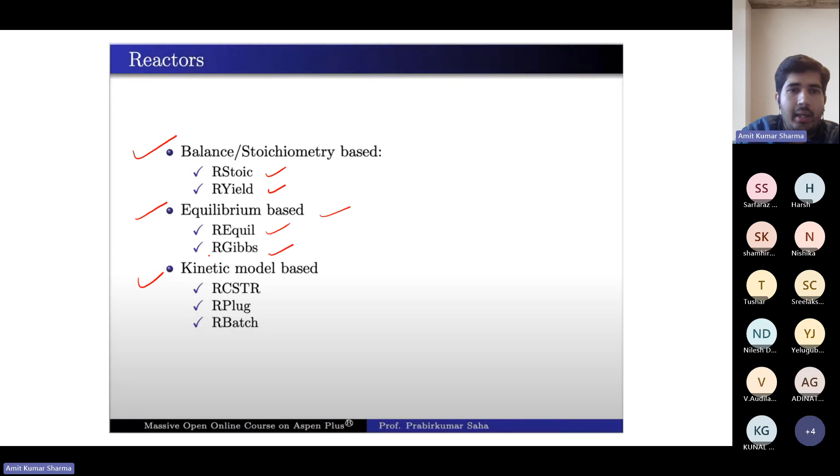So the reactors are basically three types. One is the balanced, then equilibrium, then kinetic. In balanced reactor, like R stoichiometric and R yield; in equilibrium based, REquil and RGibbs; and kinetic, R CSTR, R plug, and R batch. So these are the basic reactors. You can see these in the model palette. We have separate individual models for these kinds of reactors. Each reactor has its specific work. We will discuss briefly, and then we will go through some examples.

So in the stoichiometric block, the model works with the specific extent of reaction or conversion. If you know the conversion, you know all the stoichiometry, then we use this kind of block. Then there's a model where the reaction kinetics are unknown, but the stoichiometry is known, you know the stoichiometric coefficients and all the stoichiometry, but you don't know the reaction kinetics. Then we use this block. It performs product selectivity and heat of reaction calculation.

So important, what is the fundamental for solving behind this reactor. It performs the product selectivity and heat of reaction calculation. It can run either simultaneously or sequentially. This is about the stoichiometric block.

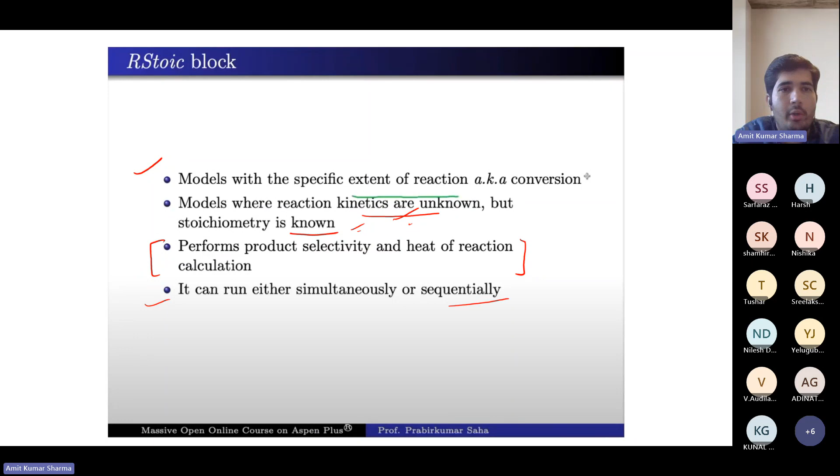Then the R yield block. It does not need kinetic or sizing information. For R yield, we don't need kinetic data, and we don't need the sizing information. Then here you need to choose the mole basis or mass basis. In mole basis, number of moles of the chemical leaving through the outlet per total mass of feed, and in mass basis, mass of the chemical leaving through the outlet per total mass of feed.

So basically you can define how much mole or mass will be leaving, and based on that, it will do the conversion. So R yield satisfies the total mass balance, based on the total mass balance, not the individual component balance. It gives a warning message that it's scaled up or down. The molar mass balance means that the total outlet mass flow rate is still equal to the inlet mass flow rate. So it is based on the total mass flow rate balance, the inlet flow will be equal to the outlet flow.

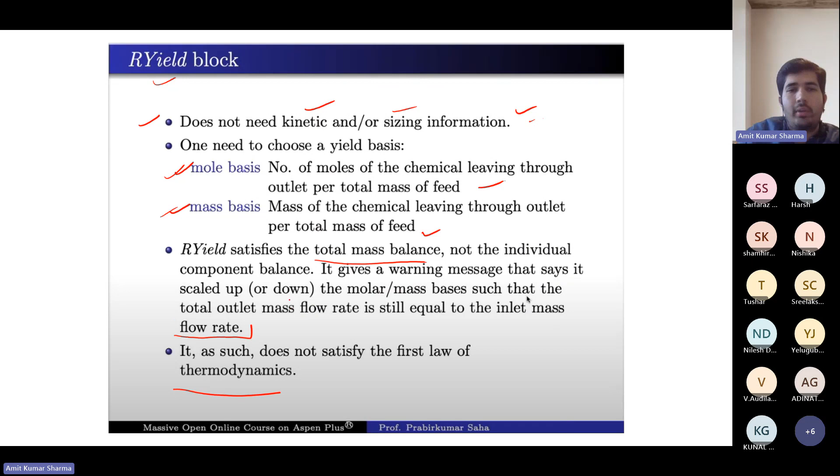As such, it does not satisfy the first law of thermodynamics. So it is important to note, it does not satisfy the first law of thermodynamics.

And REquil, this one is useful for modeling a reversible reaction, assuming that it achieves chemical and phase equilibrium. So you have a reversible reaction and you assume that it will achieve chemical and phase equilibrium. From the name itself, REquil is based on chemical or phase equilibrium. It calculates the maximum thermodynamically possible conversion one can achieve based on the reaction condition.

So it will go for the equilibrium, then find the maximum thermodynamically possible conversion. It is wise to use a sub-equilibrium condition at an approach temperature. We can also define the approach temperature. It computes the equilibrium constant directly from the Gibbs free energy of reaction at the temperature of the reaction condition. So you have defined the conditions, and based on those conditions, it will calculate the Gibbs free energy and do the equilibrium calculation.

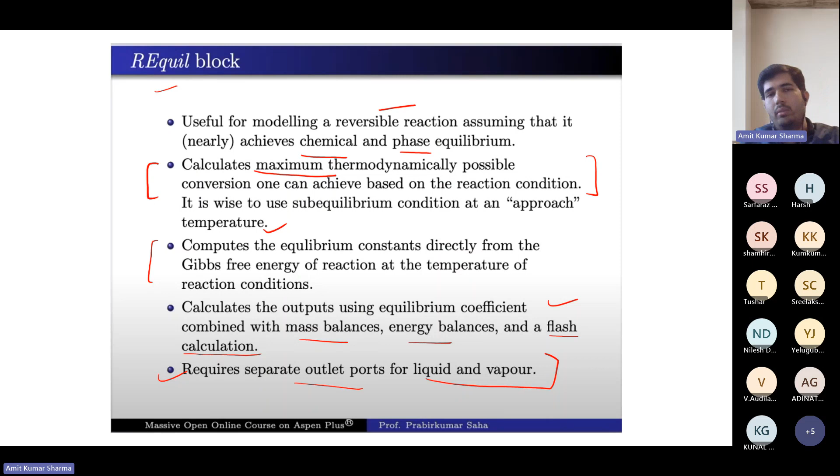It calculates the output using the equilibrium coefficient combined with mass balance, energy balance, and flash calculation. This is important, it will do the calculation using the equilibrium coefficient combined with mass balance, energy balance, and flash calculation. It requires separate outlet ports for liquid and vapor, because it is based on chemical and phase equilibrium, so it will show all phases from that equilibrium, some liquid or some vapor. Based on that, it requires separate outlet ports for liquid and for vapor.

Then the RGibbs block - it does not need to specify the equation. If you are using RGibbs, given infinite time for reaction, chemical equilibrium is achieved when the product mixture reaches its lowest possible Gibbs free energy.

So you don't know the reaction. You know that your system has carbon or hydrogen, and they will do some reaction at high temperature, so there will be some combustion. From that combustion, maybe different kinds of gases will be there, but you don't know their kinetics, like which will come in first. So you don't know all the data.

Similarly in reforming also, if you are having methane, CO2, and steam, there can be steam methane reforming, dry reforming, reverse water gas shift reaction depending on temperature, maybe methane cracking. So there can be different kinds of reactions, and you don't know all the reaction kinetics.

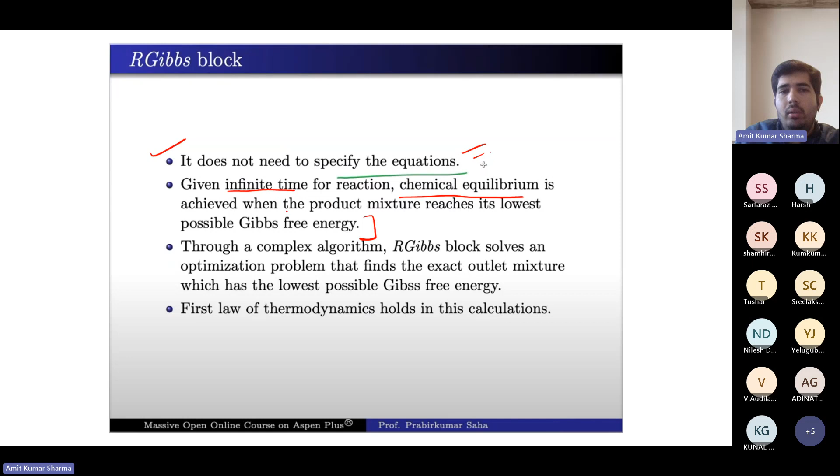But you know the input. So based on that, with the temperature condition and the pressure condition, it will assume infinite time of reaction, and it will reach chemical equilibrium, and it will show you all possible phases at the lowest possible Gibbs free energy.

So this is the Gibbs block, and through a complex algorithm, RGibbs block solves an optimization problem that finds the exact outlet mixture which has the lowest possible Gibbs free energy. And the first law of thermodynamics holds in this calculation, so it's also valid here. You can use this Gibbs block for the calculation to find out the possible outcome from some input.

So let's take an example. I think this example was also discussed in the class.

In this, you can see we have a reactor, and this reaction is actually the water gas shift reaction. The carbon monoxide will react with the steam and convert into hydrogen and CO2. You have given the temperature, the pressure, the flow rate, and 92% conversion of CO for RStoic and RYield, and 253 approach temperature for REquil. And you have to use the Peng Robinson equation of state with Boston Mathias property methods.

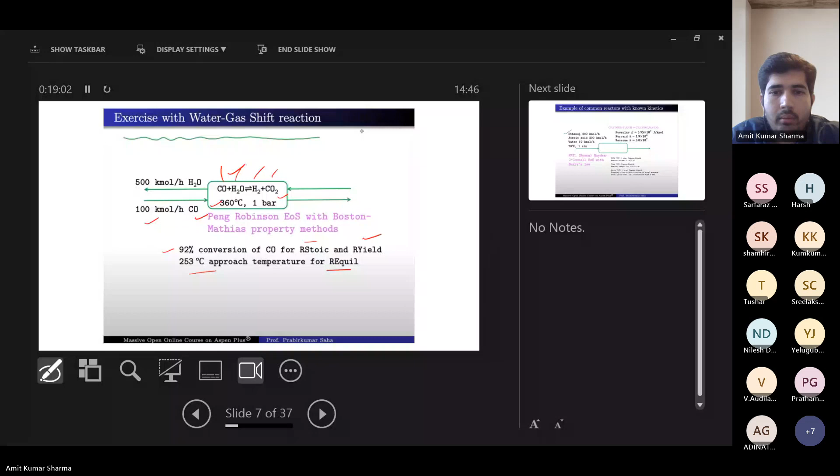I think my screen is visible. Yes sir, okay, thank you. I think someone is unmuted, please mute yourself.

Here I have all the reactors. Here we have the feed, then we have a duplicator, so we are supplying the same feed to all these reactors. And we will see how different options are available in each reactor, and what kind of things we can do with this.

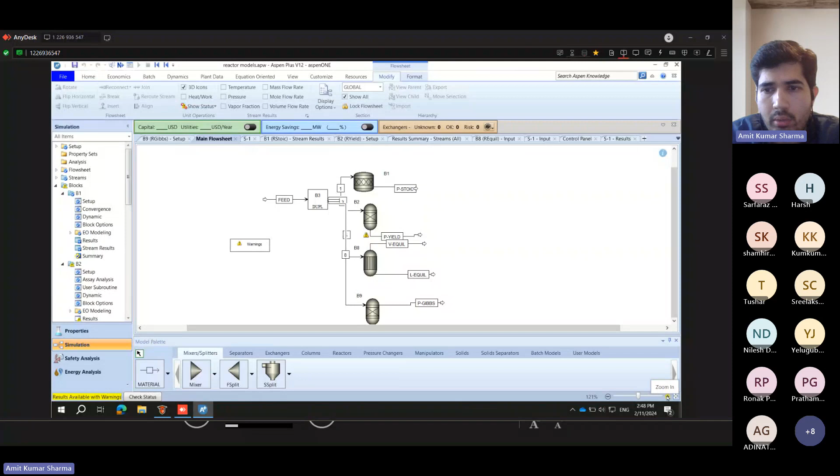So if you want to see the inputs, my screen is visible? Yes sir, yes, okay okay. Let me make it a little bit zoom. I think now it's better.

On the left side, you have all the items for the simulation. You can see the blocks B1, B2, B3. You can see all the results, and at the bottom you can see the result summary for all the results. So first go to the properties. If you want to see the inputs and methods, go to the property, then the components. So the components are H2O, water, carbon monoxide, carbon dioxide, and hydrogen.

So from the question, we have given a reactor and we are doing water gas shift reaction, we have given the flow rate of carbon monoxide, the flow rate of steam. Here you can see the output, and we have given the data for these two reactors and this reactor. So with only these inputs, we will model this for all the reactors. Let's see - so these are the inputs.

If you go to the methods here, we are using Peng Robinson with Boston Mathias modification. So we have given this method to use. I think somebody had a doubt regarding the free water method for petroleum calculation option - we have steam table correlations here, different kinds of correlations. Sometimes if you are using a particular method, we need to change this free water method also. So please check this, maybe the issue is with this.

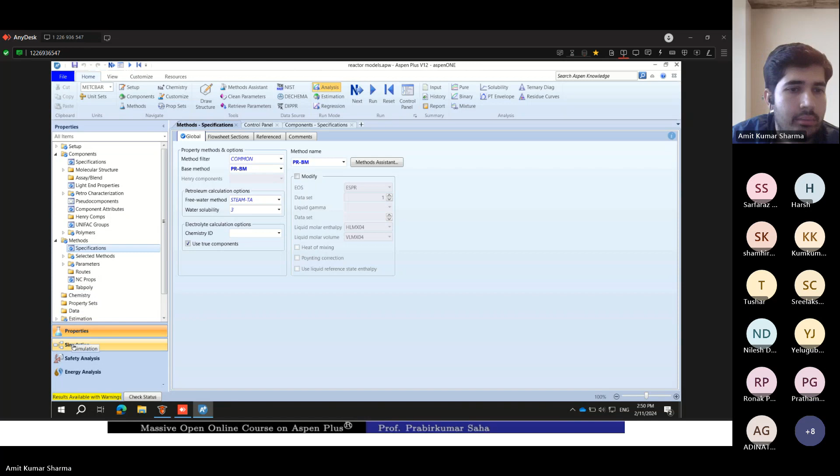At the bottom we have the reactor pallet: stoichiometric, yield, equilibrium Gibbs, CSTR, plug, and batch. If you click on the feed, you can see the input. The temperature is 360°, pressure 1 bar, and the mole flow is 500 and 100.

One important thing, sometimes students make a mistake here. They put the total flow rate here, and also want to give the mole fraction, but forget to change the composition option. If you're giving total flow rate here, suppose I give it 1000.

Suppose the total flow rate is 1000, and H2O is 50% and CO is 50%. If I select total flow rate at this location, then give the mole fraction here like 0.5 and 0.5, it will divide this flow rate in half and half. But sometimes you forget to mention the mole fraction and instead click mole flow, where the unit is kilomole per hour, then enter 0.5 and 0.5 — it will take this data and maybe you'll get a warning, or it will run with different results. So be careful, it should be in sync.

Suppose here we are only having one reaction. But if you have multiple reactions, like if you are having combustion, in the combustion there can be multiple reactions. So you can add more reactions by clicking on New. Here you need components. If you have multiple components, then first you need to specify all those components in the property segment. In that segment you need to specify the components, then identify all their properties, then they will appear here.

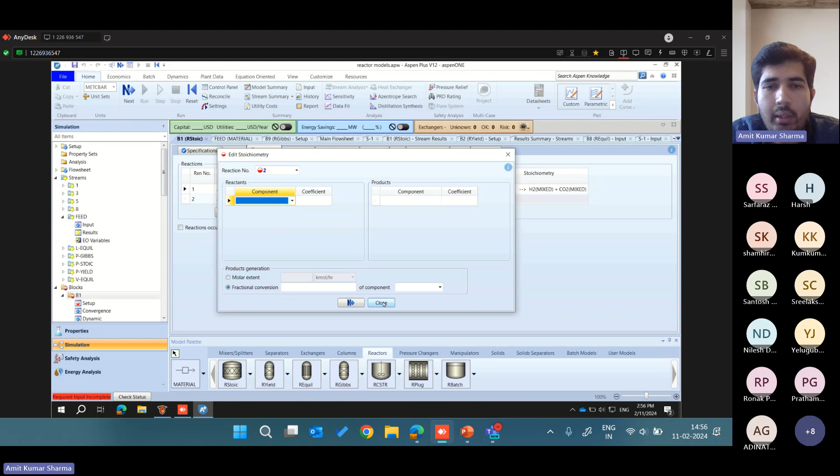So here you can select the component, select the coefficient, then you can select the products, and you can do this calculation. Just because here we are only working with the water gas shift reaction, we only have one reaction, we don't have two. But you can add multiple reactions, and you can also say the reactions occur in series. So if you know first this reaction will occur, then second, then third, you can click on this option. Then this reaction number is important.

If you know that your reactions are happening in a particular series, because if one reaction produces some product, only then will the second reaction occur, then you can select this here also. Because we have selected reaction number 2 but have not entered any data here, you can see this blue tick changed into red, so it requires input. As we have only one reaction, just delete it. Now it's again turned to blue.

So these are the basic inputs, but if you have more data, you can go to combustion, heat of reaction. There are more options. You can also choose selectivity. You can go through the manual and find how you can further advance this reactor, and how many more inputs you can give to the system. So this is about the stoichiometric reactor, and if you run it, we can see the result. So let's go to the result.

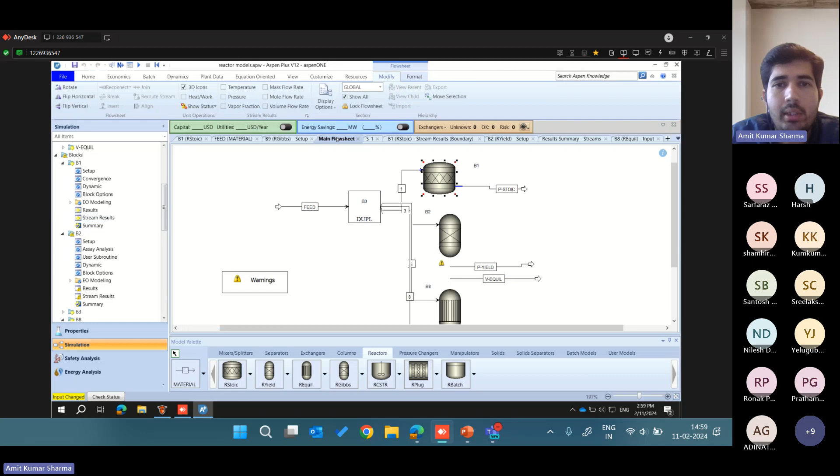Now this one is the yield reactor. For CO, we have given 92% conversion for the stoichiometric and also for the RYield. So what are the options available in this reactor? In the specification you have two options here, temperature and pressure, because we have given only that. But if you have given something else, like duty, vapor fraction, or temperature change, you can select from these four options. We have given temperature and pressure, so we choose these two. The valid phase will be vapor-liquid. Then go to the yield.

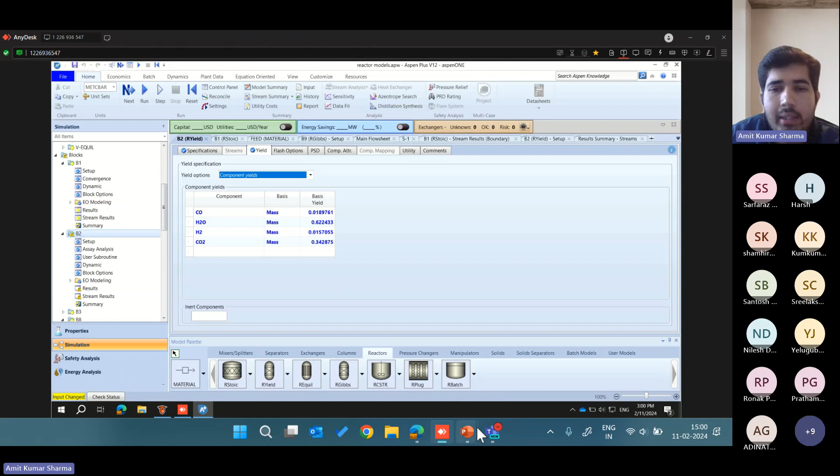So the thing is, if you check here, we have given the same conversion, 92%. But if you want to use the RYield reactor, you should have the data for the exact yield of each component. If you have that data, you can use it directly, but if you don't, then you first run the RStoic. From the stoichiometric you will know the molar flow rates, then you can use RYield, or you can do some theoretical calculation, find the composition, and enter it in the RYield. So here from the RStoic, if you see the yield basis, from the mole fraction, the mass fraction will be this.

Okay, you can check this data from the stoichiometric reactor results. So we know the data, just enter, like the CO will be this. So if you want to see, you can go to the block B1, then the stream results. So if you go to the mass fraction, here you can see that the steam is 0.622433, CO is 0.0189761, like that. So you have all data, your mole fractions, your mass fractions, so you can choose any

of these data, and then again go to the yield reactor, and you can check here the basis, mole or mass. You can choose mass, then enter the correct yield. Okay, so you can enter these components, and also there is the yield option. So we have component yields. If we know the components, there are some more options: user subroutine, component mapping, petro characterization. So you have multiple options here. For these options you can refer to the manual.

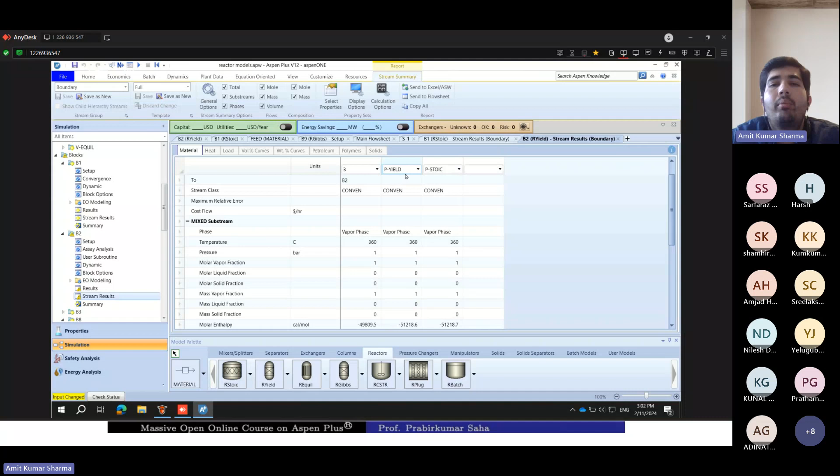So now let's also make it to the stoichiometric, so we can compare. So we have both the yield results and the stoichiometric. If you see, they are nearly the same, because we have given the same data from the RStoic to the RYield reactor. Okay, so they are almost the same.

But if you also see, we have a warning here in RYield, because RYield is based on the mass balance. So it will do the equal mass balance for input flow and output flow. Due to that, there is a warning. If you want to see the warning, then go to the results status. So the specified yields have been normalized by a factor of 0.9999. So this factor is used to normalize the mass balance. So you can have this kind of error in RYield.

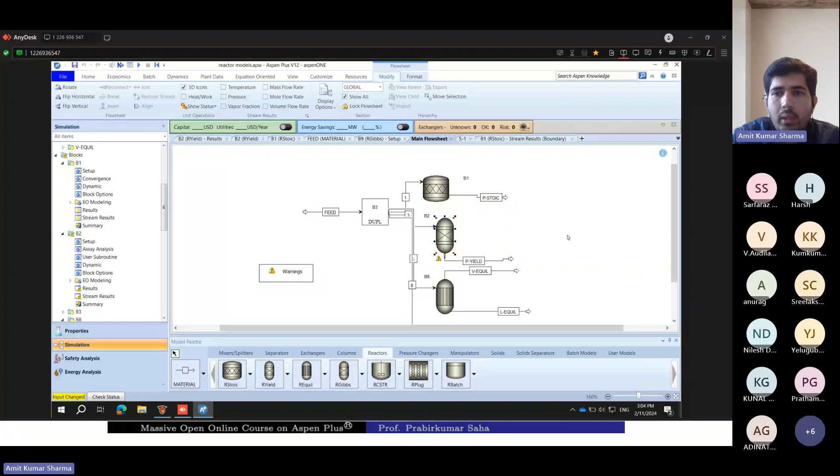Now, the next reactor that we have is the equilibrium reactor, REquil. In this reactor, you can see we have two outlets, one for the vapor and one for the liquid. So it's easy if you know that there will be two phases and you want to see them exactly, then you can use this. So here also the temperature, valid phase, vapor, liquid, both, then the reactions. So we have already defined the reaction, so here it's already using reaction one.

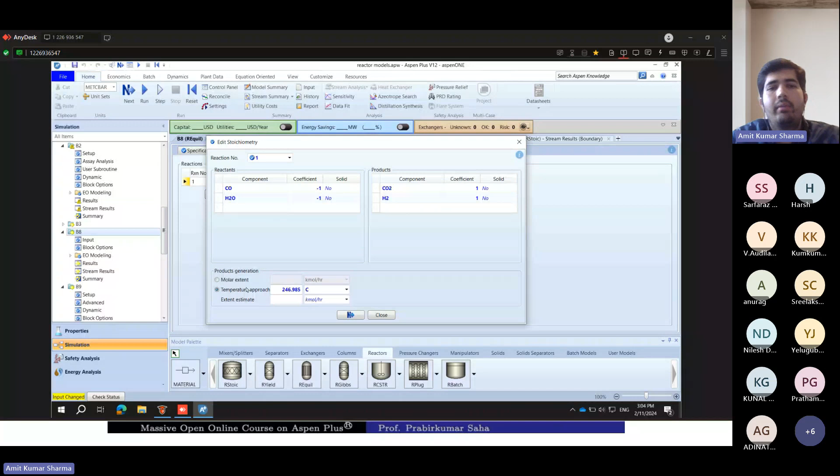Click edit. So here we have two options, like temperature approach or extent estimate. If you have given some extent estimate, then you can use that, or you can use temperature approach. In the question, the approach is 253 degrees. So you can use that temperature here, but this is the exact temperature to get the data. So you can find the exact temperature from all these reactors. Okay, so you can enter the temperature that is given in the question.

Okay, other options are also there, like convergence, maximum iterations. You don't need to enter these, but if you do advanced modeling, then maybe these options are useful. But as of now, only the specification and reaction are useful. If you go to the result, it's the model number B8. So, stream results.

So we have L equil, V equil, liquid phase, vapor phase. So there is no liquid; in the liquid phase there is nothing, and we have the vapor phase only. Compare the results with the stoichiometric. It's near, because initially it was mentioned 253 degrees temperature approach, but from the calculation we can optimize that, and we know that 246 is the temperature that will achieve 92% conversion. That's why we use that.

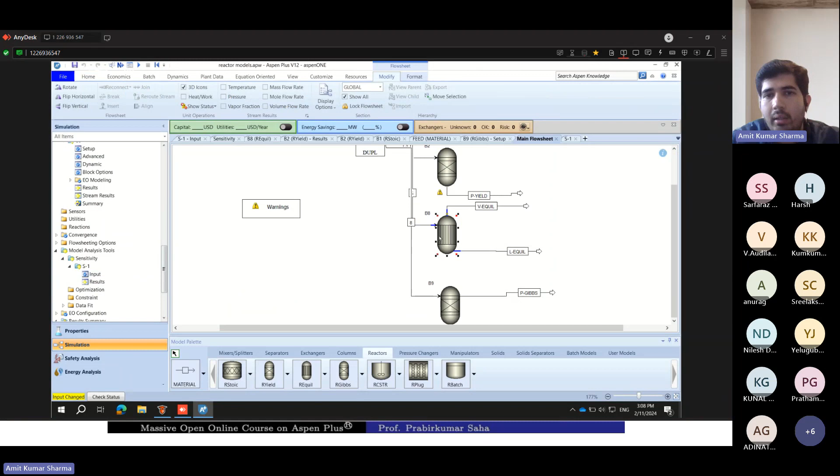Which block? B8. You have to specify your block number. You can also rename those, so be careful with these when you use this. In the main flow sheet you see it's B8, so that's why we have to use B8 here. Then the variable, which variable you want to select to vary. If you click on it, you find approach here, so you see the temperature approach. So this is the variable.

Actually this is the visual interface for Aspen, but in the background it is having some calculation, as we discussed in our previous classes. It defines the variables and all things. So this is the variable that Aspen defined for the calculation. If we want to optimize it, then we need to know the variable name, so that the equations behind the models will optimize that particular variable. So here that is delta T, del T.

So click on that, then give an ID, then units. So it's in degree. Then here you can see the manipulated variable limit. You can mention the start point and end point. Like, if you know, you can mention 230 to 260. So it will give you results from 230 to 260, and you can mention the increment and all.

Then you can define which stream; we want to see the composition of the stream, like the amount of CO2 in the product stream. So you can use the stream and define mole fraction, which stream. V equil is the output stream name, then it's mixed stream, then component CO2. So if we vary the temperature, we want to see the change in CO2. First you have defined that you will vary the del T variable for the R equil reactor.

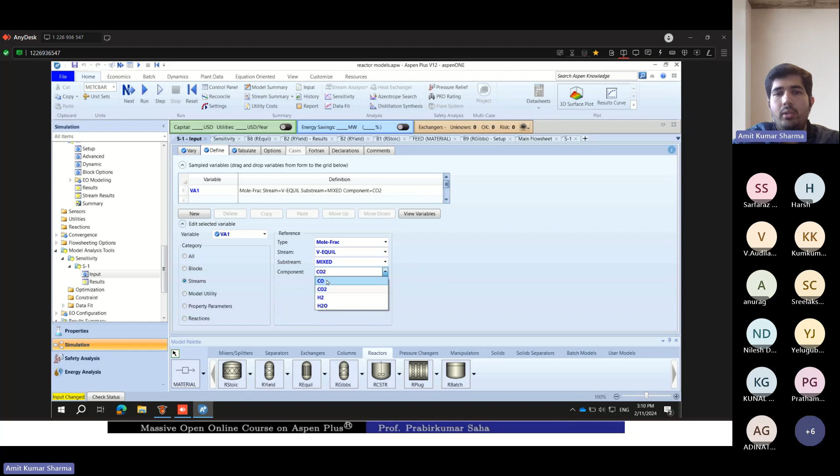Then you want to see a variable which will change. So you want to see the stream data, and which data? The CO2 component. We have these components, you can select any component, CO, CO2, but you want to see the CO2. Or you can also select the CO. So for this, we have selected the CO2. Now if you select it, then go to tabulate. It will tabulate the variable and give you the result.

So if you see the results here, I have mentioned 246.5 to 247.5. So it's changing the temperature like 246.53, 246.54, 246.55 like this. And you see the mole fraction is changing like this. So now you can compare this mole fraction with the R stoichiometric or R yield, and find the temperature at which your system will achieve the 92% conversion. Am I clear? Okay.

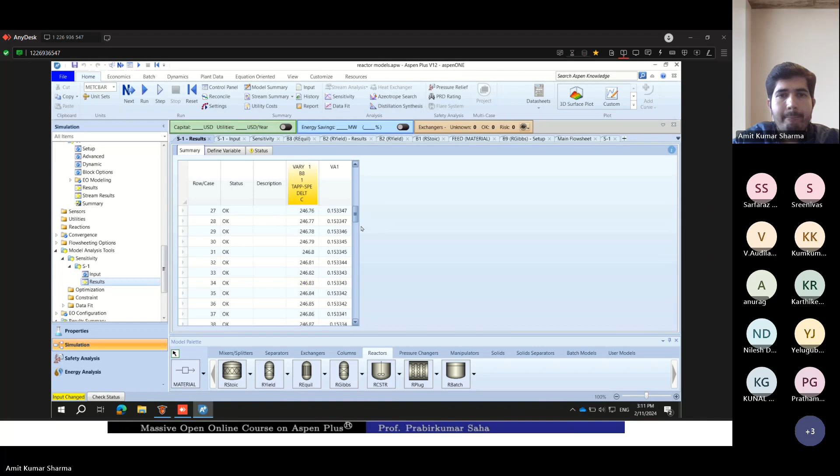So now if you want to see the Gibbs free reactor, you can see here it's a Gibbs reactor. Here you can mention different calculation options like phase equilibrium, or phase and chemical equilibrium. Here we have chosen phase equilibrium and chemical equilibrium. You have defined the pressure and temperature. You can also define the heat duty. If we have defined this temperature, then it includes vapor phase also. And here you don't need to specify the reaction. It will show you all the phases.

So here you see the RGibbs considers all components as products. So it will take all the components as products, and there are more other options. You can also go through the other options in the manual, you can read about this.

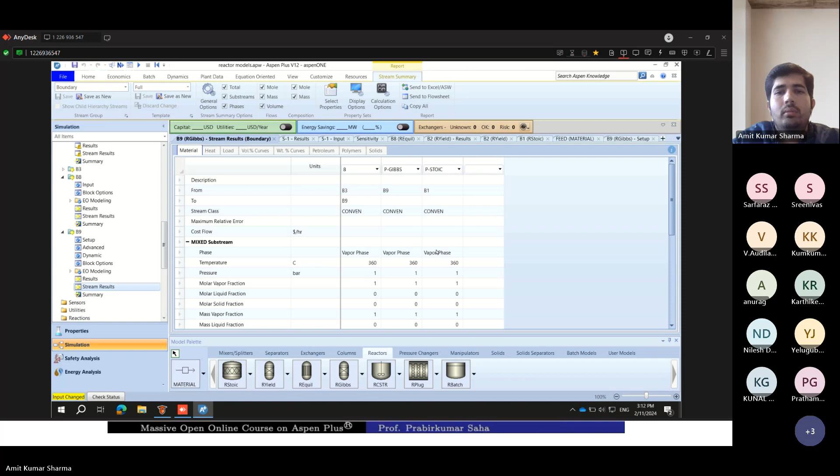So if you compare the results, see, if you see the H2O, let's see the mass flow actually. So from stoichiometric we get 185.461 kg per hour, but from Gibbs, from the total equilibrium calculation, we can get up to 199.018.

And you see, like CO2, the output is 4048, but here 4344. So in this way you can compare all the RGibbs regarding the yield and all. You can compare all the data.

Okay, so let's go to the flow sheet again. So this is about the reactor, and we also have the CSTR, RPlug, and RBatch. So in these also we can have some other parameters. Let me go to the PPT.

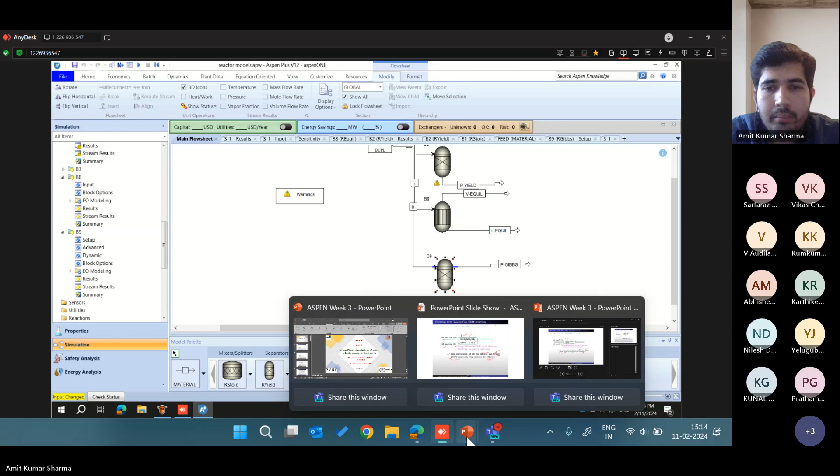So now, for the common reactors, if you are given the kinetics, here we have another question. We are given the kinetics, the power law, the forward K and reverse. You have to use this law, and you are given for the CSTR the temperature, pressure, vapor liquid phase, and volume. For the plug also all the details, the method, the inputs. And you have to make the CSTR, plug and batch reactor. So let's quickly go through an example.

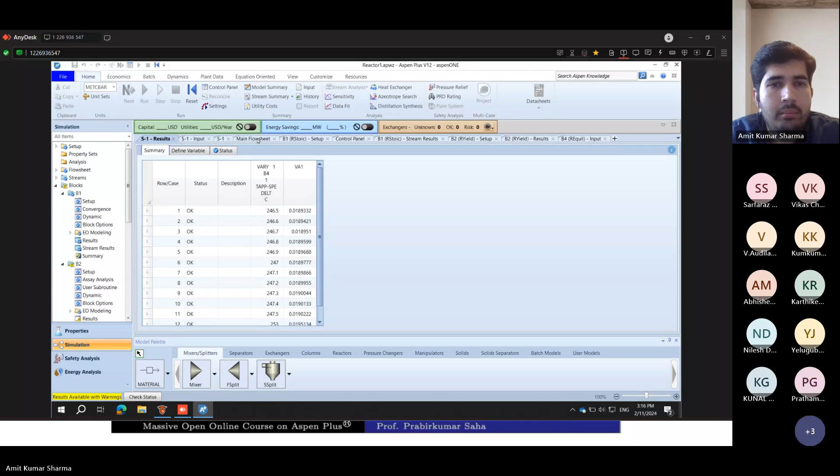The system is slow, sometimes it takes time. Okay, it is the same one. Just give me a minute.

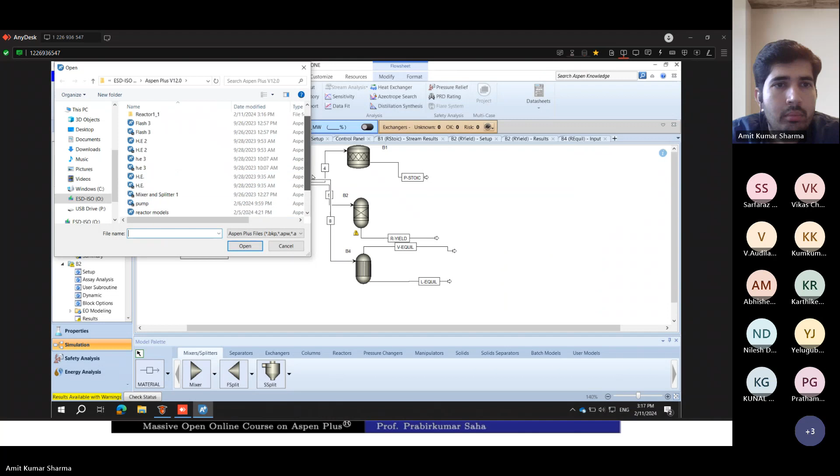Okay, we can see quickly here. Suppose you just take the CSTR, RPlug, RBatch. Because we already know how to do the calculation, I want to quickly go through the options available. If you go to the CSTR, you need to specify the temperature. You have two types of model fidelity, conceptual and equipment based. If you have more data, you can use equipment based, and you have to give the vessel data. For the conceptual mode you don't need the vessel data, but still you need to give the kinetics data.

So if you go to the question, we have given the temperature, the pressure, vapor liquid phase, and the volume. So first we define this data in our compound specification, then the property, then the simulation window. We will select the reactor, and we have these inputs, and these are the kinetic data.

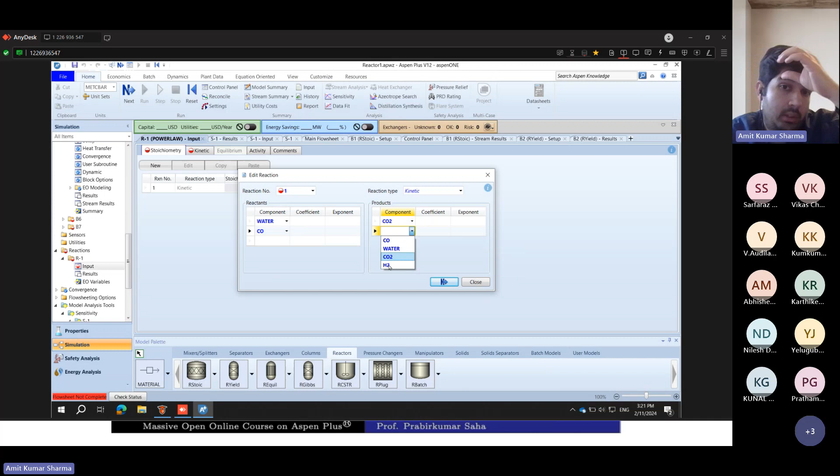Then you need to go to the reactions, go to R1, and you can see input is required. So here you will define the reaction. Then you can choose the components. Suppose we again take the water gas shift reaction: the water will react with the CO, and it will result in CO2 and H2, and the coefficient is, okay.

So here you need to go into the kinetic parameters. You have been given the K value. Here you can enter the K value. Okay, you can enter all the values that you have been given for the kinetic parameters. The reacting phase you can mention, the rate basis, like volumetric or weight basis. Okay, so you can see this, and we have given the data here.

So you have been given the E value, the K value. You see this sign. So maybe this reaction can also happen in the reverse manner. When you're dealing with reaction kinetics, there are many parameters. So you need to define both forward and reverse direction. It can go in this direction and this direction also. The direction will depend on pressure, temperature, energy and all these data.

There are more data, so you can go through more about reaction kinetics. You can learn more things about these. The kinetics is very important. Okay, so you have this formula. You have been given these values, so you just need to put them in, and you can just run it. It will give you the result.

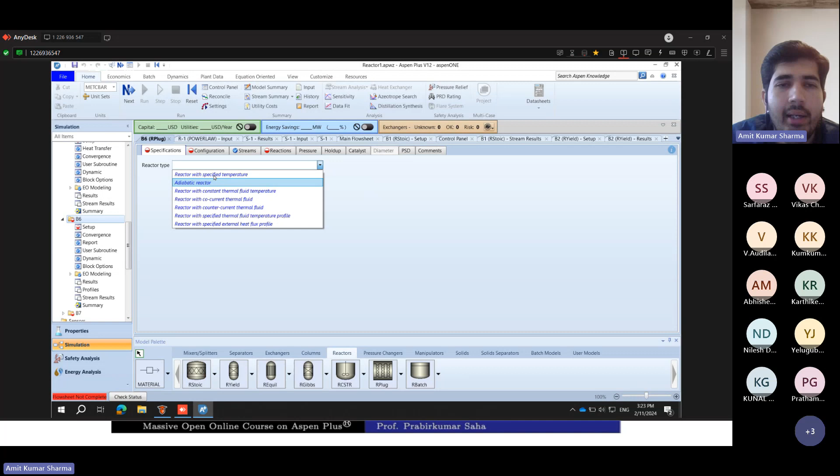So these are the options here. Again, go to the flow sheet. For the plug flow reactor, you can specify the type; you have different options, like adiabatic reactor, reactor with co-current thermal fluid. So you can specify different kinds of reactor type. Let's say adiabatic reactor. In the configuration, you can define the length or diameter. If you have the length and diameter, it's good. We have given here the reactor length is 2 meters, diameter 0.3. So you can mention that.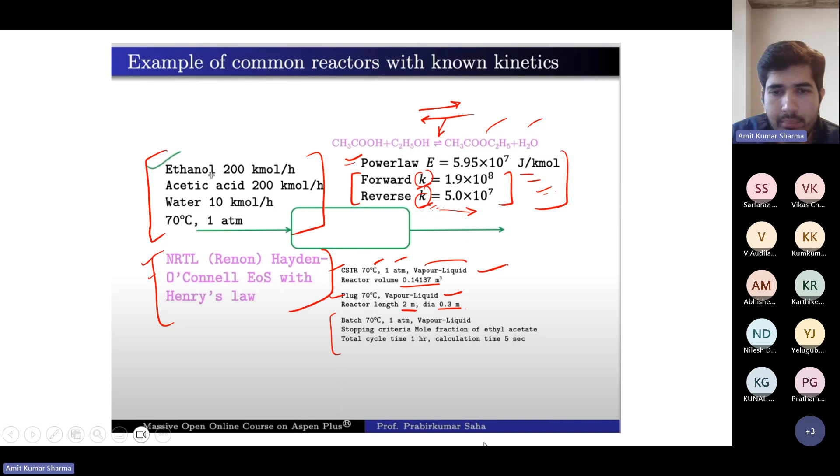You can check the vapor and liquid phase. Here it will be vapor, and you need to change it to vapor-liquid. It's important. Again, the reactions we have already defined. If you have already defined reaction R1, it will directly come here. Just select it. Suppose you are doing complex modeling with multiple reactions, and a particular block needs only two reactions, but in your system you have defined 8 reactions. You can just select them, and now only these reactions will take part in this particular block.

So now let's take the batch reactor. In the batch reactor, you can see the temperature specification. You can define constant temperature, profile, heat duty. There are multiple options. Then the reactor phase: liquid only, vapor-liquid. We have given vapor-liquid, stopping criteria mole fraction of ethyl acetate, total cycle time 1 hour, calculation time 5 seconds. So we have given more data here.

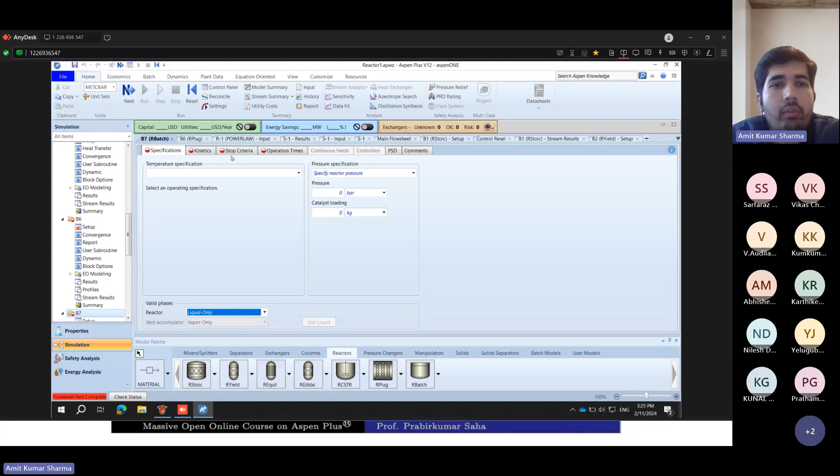You will find kinetics, reaction, and stop criteria. Here you have to specify the stop criteria. The time, then cycle time you can specify here. We have given the times in the question. So you can specify these things here. So these things are about the reactors. We have covered stoichiometric, yield, equilibrium, Gibbs, CSTR, plug flow and batch. Let's go back to our slides.

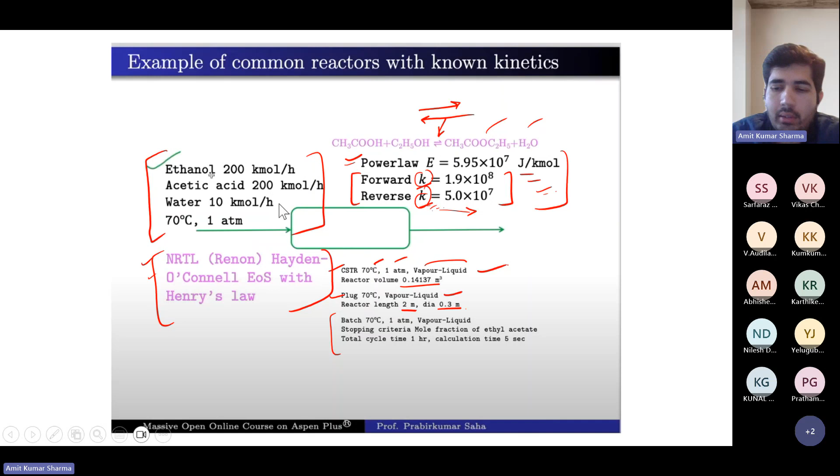So we have also covered pump. In pumps, we need at least one input and one output. The feed must be an incompressible fluid in liquid phase, and it may also be used as a turbine. So the pump can also be used as a turbine.

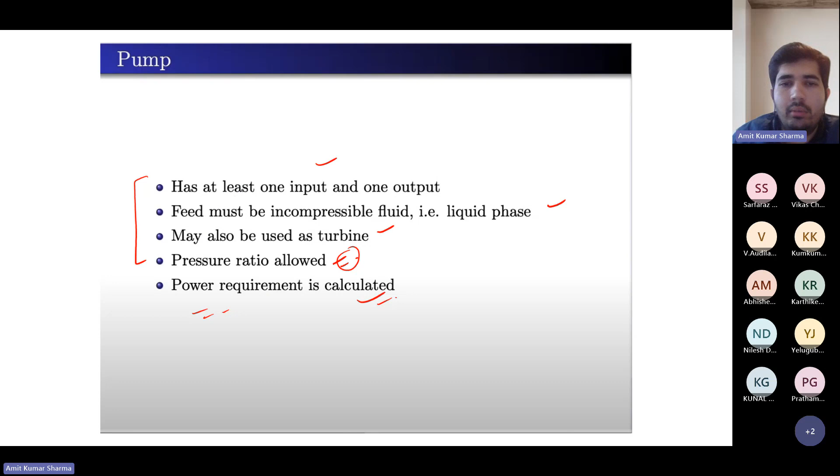Then for pressure ratio, we can enter the pressure ratio. If you have the exact pressure, you can define that, or you can mention the pressure ratio. Suppose you need 3 or 4 pressure ratio - if your input is at 5 bar and you apply a 4 pressure ratio, then it will be 5 multiplied by 4, and power requirement is calculated. So with this data, you can calculate how much power is required to run that pump, or if you are using it as a turbine, you can find out how much power this turbine will generate.

Similarly, for compressor, there is at least one input and one output. It's used for pressure increase in gas phases. So if you are dealing with the gas phase and want to increase the pressure, we can use the compressor. Because further from this week, we are going to see complex examples of complete systems.

There will be multiple BOPs like balance of plant equipment and all, so we'll do the modeling of these things. So in that we have to also use compressor, pumps and all. It can also use turbine, pressure is allowed, performance curve.

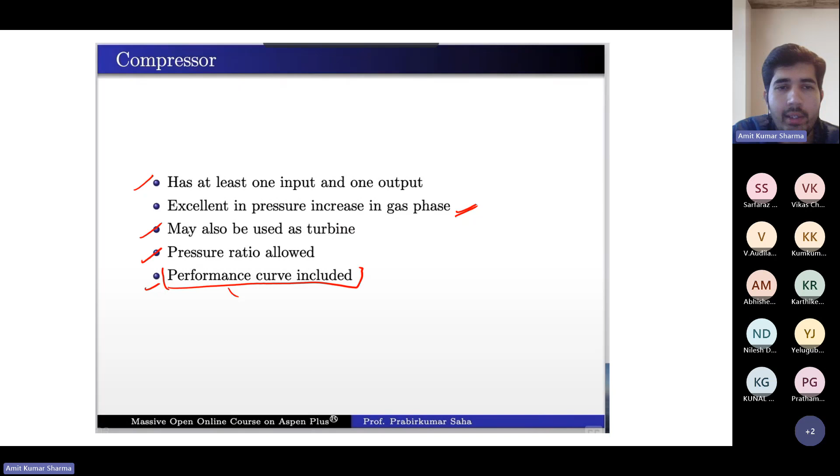So basically for the compressors, we have different data, like how the efficiency and performance is, because sometimes the performance will change with the pressure ratio, with the flow rate and all things. So if you have the curve, then you can use that curve - you can enter that curve in the modeling part, and the results will be as per that performance curve. Aspen also has some built-in compressor models from some vendors, with their curves already defined, so you can directly select those also. That is a basic example.

So here we have given water, then for the pump we have given the efficiency. The globe valve we have given an opening, 50% opening, then we have given a pipe. We have given the performance curve here, or an efficiency curve - you can see the change in flow rate with the head. So you can use this data to model the pump, and also use this data for the efficiency calculation. We will go to this example if time permits.

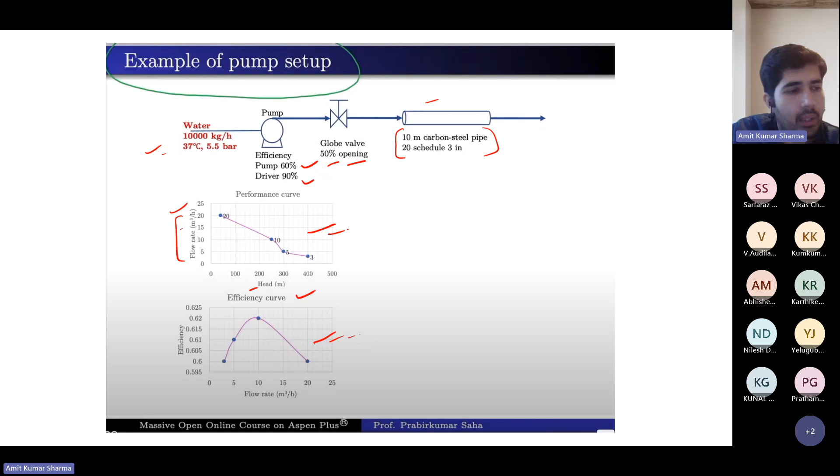Just moving forward for the questions - now the example of turbine. We can also use an isentropic turbine. Here the steam flow rate we have given, and the steam outlet we have given. So we know the flow rates, we know the data, we have the model palettes for the compressor. We can use this and we can get the result.

So if you have the isentropic efficiency, it's good. If you don't have the efficiency directly, then you can find the turbine efficiency like isentropic work and the actual work - so it will give the isentropic efficiency. If you don't have the exact efficiency given but you have rough data, you can find the actual efficiency from this calculation.

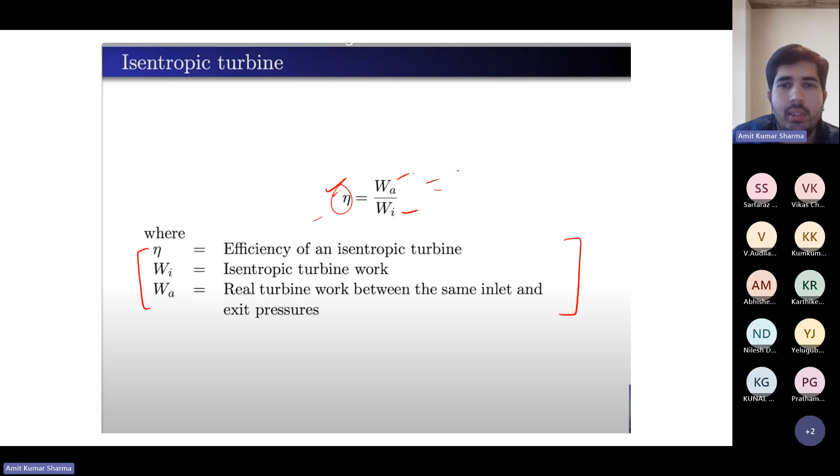So as of now we have studied the unit models, but now we will connect all these unit models and make a complete plant model. We will look into this at the end of this class.

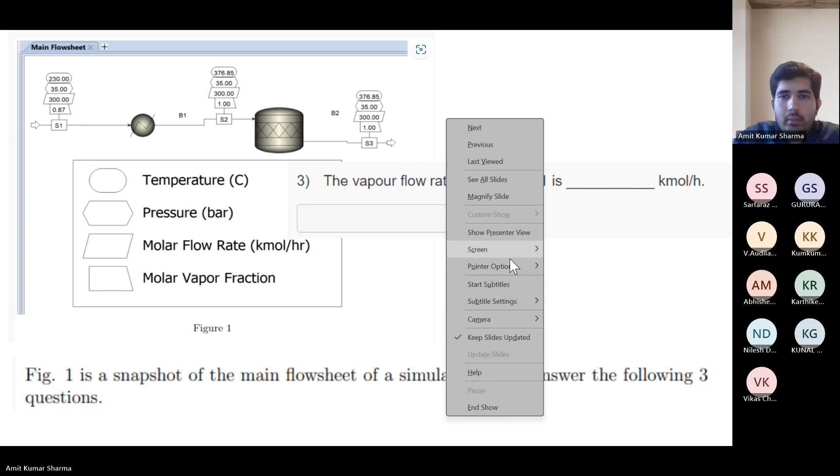Yeah, nice, so we have two answers. One we have 300, so I think you directly checked the flow rate - 0.87 to 300. And I think 261, the other answer is 260.

261 point something. Okay, so the question is about vapor flow, and you have given the molar vapor fraction, and this is total flow. So 300 is the total flow, not the vapor flow. If you want to calculate the vapor flow, you need to see the vapor fraction. Be careful with the question and the information.

So the correct answer will be 260 to 262. Just multiply within this range, so 261 point something is the correct answer. Just multiply 300 with the vapor fraction - molar vapor fraction is 0.87 - and you will get this answer.

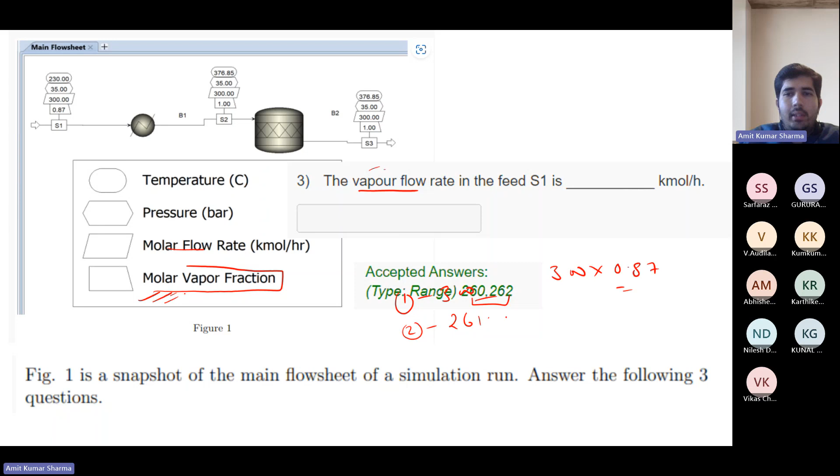Now, what is the pressure drop across the system?

So you have given a system, what is the pressure drop? Zero. Why zero? It's constant at 35 bar. So basically, if you want to see the pressure drop, check the pressure at each input and output. The heater input is 35, output 35. The reactor input 35, output 35. There is no pressure drop, so it should be zero.

The block B1 is a cooler. True or false? False, false, false. Why? Temperature is increasing, it's a heater. You can see here the inlet was at 230 and the outlet is 376.85.

So temperature is increasing, so what will be the heat duty? Will it be positive or negative? Positive. Try it in Aspen, should it be positive or negative? Positive, heat is given to the system.

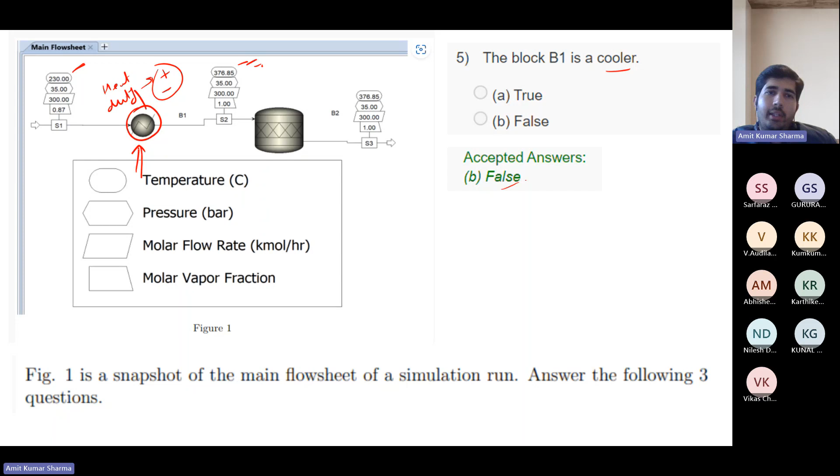Okay, try it and let me know. So this is false, the block B1 is a cooler is false, because here we can see the temperature is increasing, so basically we need to give the heat. So you have to check, if you are giving heat to the heater, then the duty should be positive or negative. Check it and let me know.

And also try this question. I think in this you have to apply the heater, then you can check. So the question is a fluid mixture of 100 kilomolar toluene and 100 kilomolar hydrogen at 200 degree and 30 bar pressure is being heated to 700 Kelvin through a heater and thereafter fed to the stoichiometric reactor, based on 90% conversion of toluene. You have given the reaction, the reactor to use, the conversion, the input. The reactor operates in the vapor phase and there is no pressure drop across the entire process. The SRK property method may be used, you have given the property method. Answer the following 5 questions with accuracy.

So just make this model quickly, all the questions are based on this only. Take approximately 5 to 7 minutes, just quickly make this model in Aspen, and after that we will discuss it. Take 10 minutes at least. Be careful with the input information, be careful with the units, be careful with the methods.

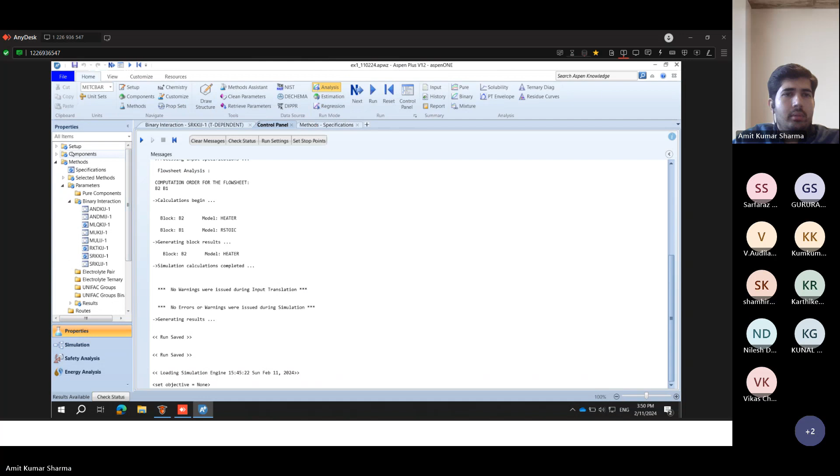So you can see first in the properties, we have defined the hydrogen, toluene, benzene, and methane. Because if you see here, these are the components that are included in this reaction. So you need to include all these components in your properties. So we have taken hydrogen, toluene, benzene, methane.

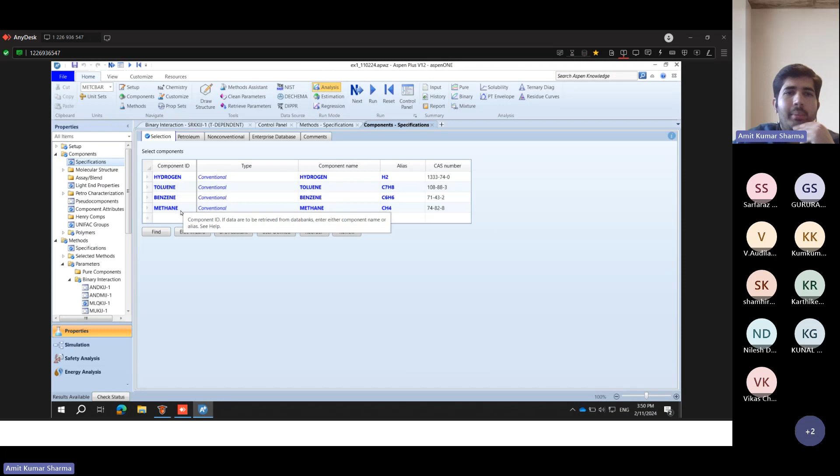Then method. We have to use SRK. Select SRK, and if you select SRK, then you need to use the free water method as STEAMNBS. If you don't use it, I think Aspen will also give you some warning regarding this. So STEAMNBS is the best method with SRK. So first we have specified the components, then we have chosen the method properly.

Now we have given that the fluid mixture, with the flow rates, at 200 degrees and 30 bar is being heated. So whenever you have a problem, go step by step. First you have a feed, then this feed is being heated, so there will be a heater. It is at 200 degrees. Whenever you are trying to do a problem, make a rough sketch. Then 30 bar pressure. So you have this data.

It is being heated to 700 Kelvin. So this will be the output stream at 700 Kelvin. And there is no mention of pressure drop, so you can consider it will also be 30 bar. The important thing is, see here, the inlet is in degrees and the outlet is in Kelvin. So be careful with this data, and with the temperature units.

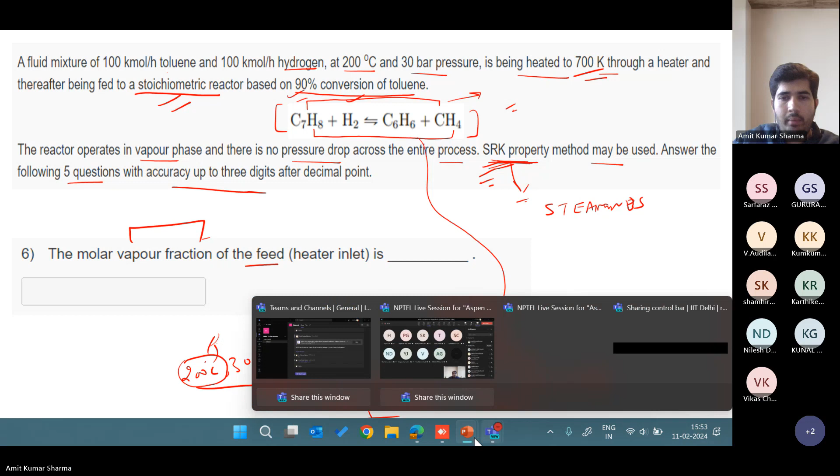If you go here, we have specified the properties and the components, then go to the simulation. Here just make a heater, then connect stream S3 inlet and S4 outlet. I think I can deactivate it. Deactivate. Okay, now I have deactivated this reactor, so now only this heater will run. Let me check.

It's a good option when you have a complete flow sheet and you want to check if you have any error in a particular section, so you can deactivate the further section. I want to see only the heater. I have calculated everything, but I have just deactivated the stoichiometric reactor and this stream. Right click and there is an option activate and deactivate, so click on deactivate. Now only your input stream S3, your heater and output stream are working.

Go to the results, the stream results. Input is S3. Here you can have the vapor fraction. You can see the molar vapor fraction is 0.698967, the temperature 200, pressure 30 bar. So the vapor fraction is this. Now let's see the answer.

So yes, the answer is 0.68 to 0.71. So the correct answer is correct. Now what is the mass flow rate of benzene at the reactor outlet? So now you have to tell me the mass flow rate of benzene at the reactor outlet. Let me know the answer. So basically, this is the outlet of reactor. So what is the flow rate of benzene here?

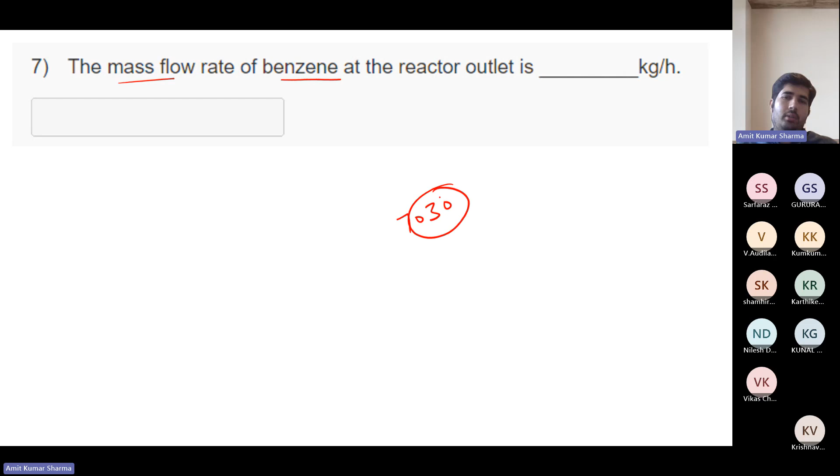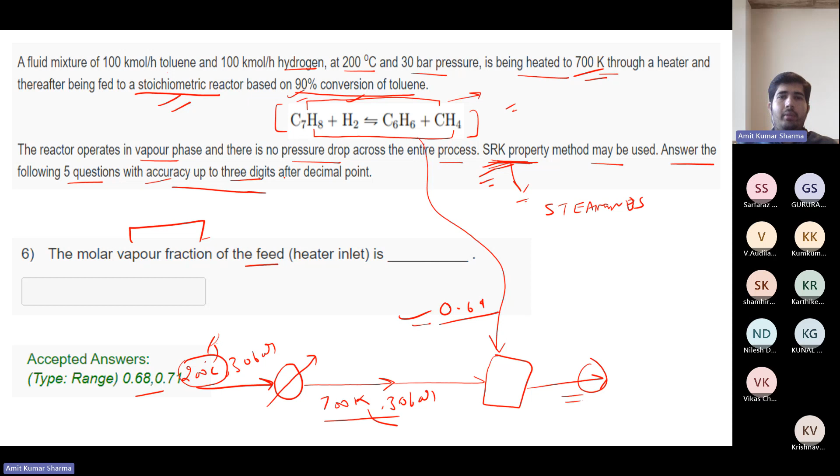7030. We have an answer 7030. Anybody else want to answer? 0.23. Okay. Yeah, actually it's better, because 7030.23. So it is mentioned here, answer the following 5 questions with accuracy up to 3 digits after decimal point. A very important point, because in this type of question, if you don't write exactly, they have their particular range, so if you only write 7030, or maybe the range is started from 7030.20, then your answer will be wrong. Okay, so be careful with these things.

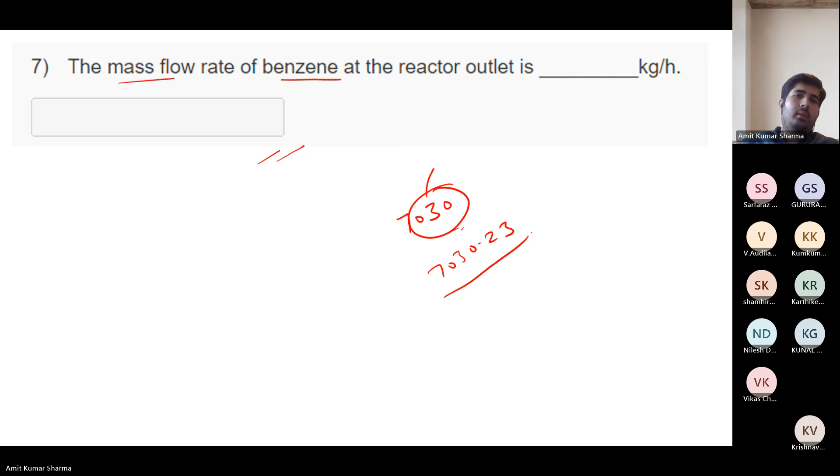Let's see. So now I want to see the result of reactor also. So right click, just activate it. Then this stream, activate it. Okay. So now both are activated. So the flowsheet is complete. You can run it. Okay, no warning, results available. And go to the stream results. So we want to see the benzene. So the stream is S4, then the mass flow.

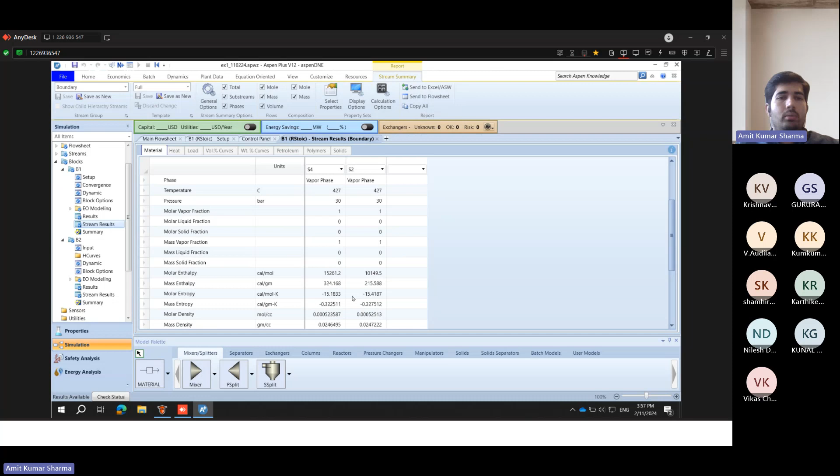Okay. Is it not working? Okay, it is S2. Stream is S2. So go to the mass flow. The benzene is 7030.23. So this is the correct answer. Okay. Yeah, see, range is 7030.22 to 24 only. So be careful. Okay.

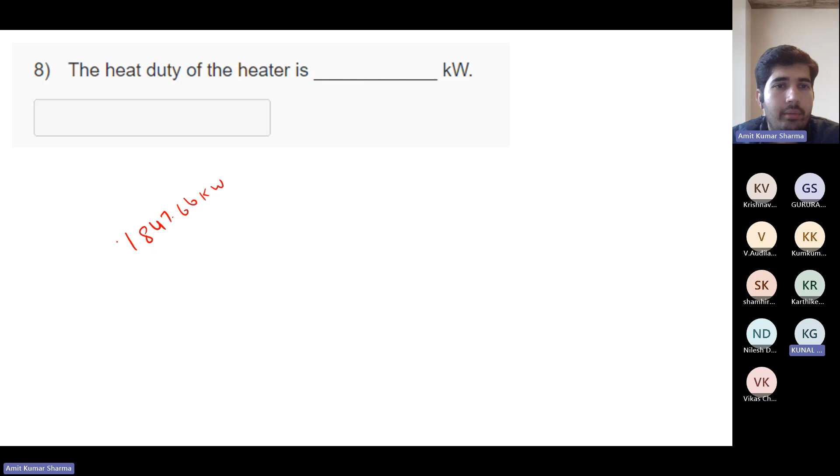The heat duty of the heater. Now you can know whether it will be positive or negative. You can see it from Aspen itself, because here we are heating it. So Aspen will give you the result in correct format. 1847.66. 1847.66 kilowatt. Positive or negative? Yes, sir. Positive. 1847.66. Positive. Okay. Anybody else?

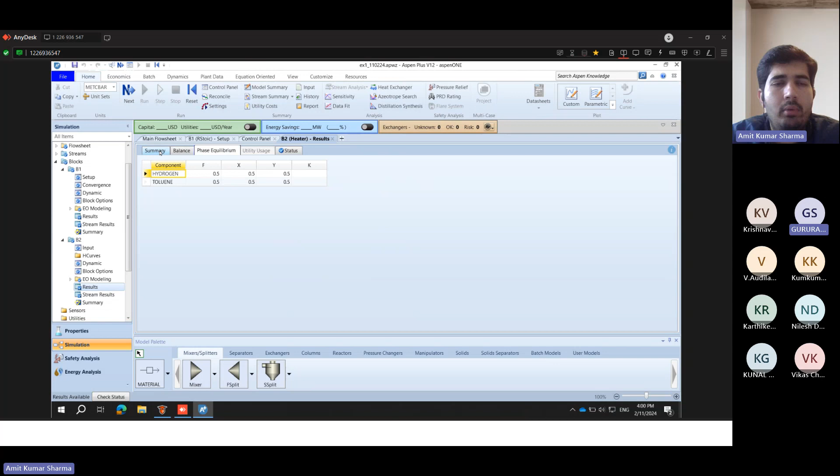Okay. So let's go to the heater. So here are the heater results. So heat duty here we can see in kilowatt. So it's positive, because we are giving heat. That's why it is positive. Its heat is given to the heater, so you are adding this heat. Okay, so you can also check the balance here. If you click on the balance, then you can see the in and out. You can see the mole balance, the mass balance, the enthalpy balance, and the phase equilibrium also. So there are options to see the data here.

So let's go to the next question. The correct answer is, sorry, yeah, it will be negative actually. Let me remove it. See, yeah, it will be negative. So that was my question, because I know Aspen will give you the result in positive. See here, it's positive. But in actual, it should be the duty of heater. We are adding heat to the system, so we need this heat actually. Okay. So minus 1188.96.

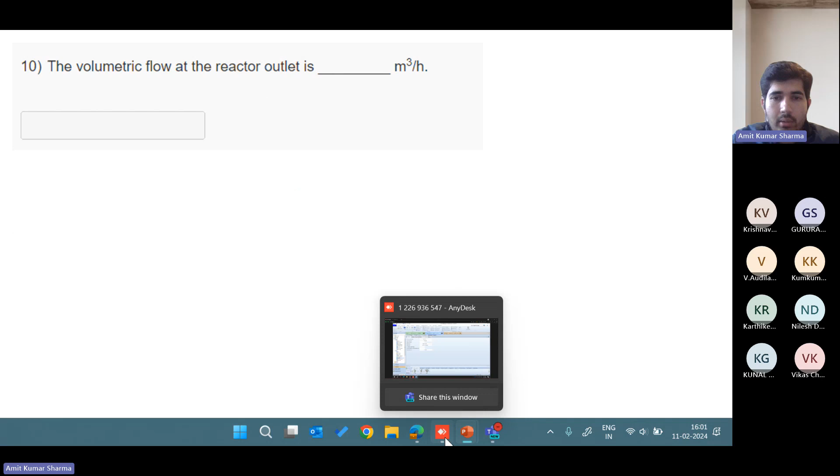I got it in negative, minus 1204.85. Okay, your answer is negative. Let me check in Aspen why we are having some positive answer also. I am also getting positive. Why? You are getting negative. Yes, sir, but a little different. 1204.85. No, I think you need to check your other data actually. But why are we getting it positive? I think in class 1 we already did a heat exchanger calculation. So we can go through that, and I will show you at the end of this class. I think I have that file with me. But it will be negative actually. Okay.

So 1188.96. The volumetric flow at the reactor outlet. In meter cube per hour, the volumetric flow at the reactor outlet. Anybody?

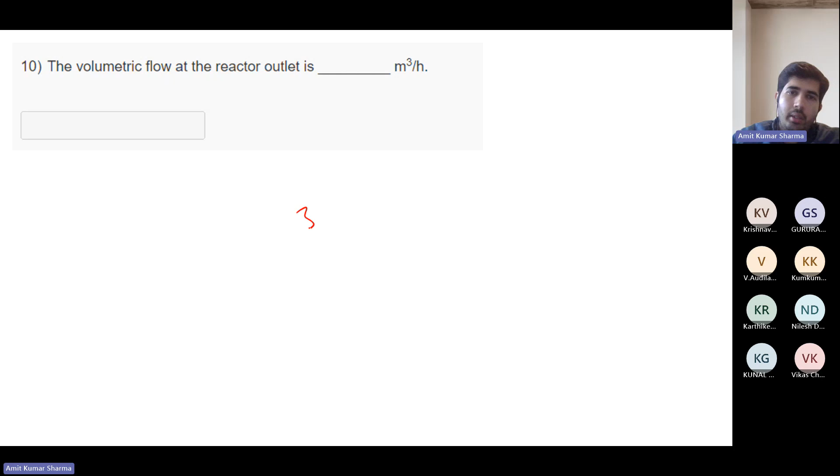380.767. 380.767. Yes, answer is correct. If you go to Aspen, then you can see the stream results. Heat added to the system duty is negative, right? See, how much? What was the flow rate? Volumetric flow, sir. Last line. Volumetric flow reactor outlet. Okay.

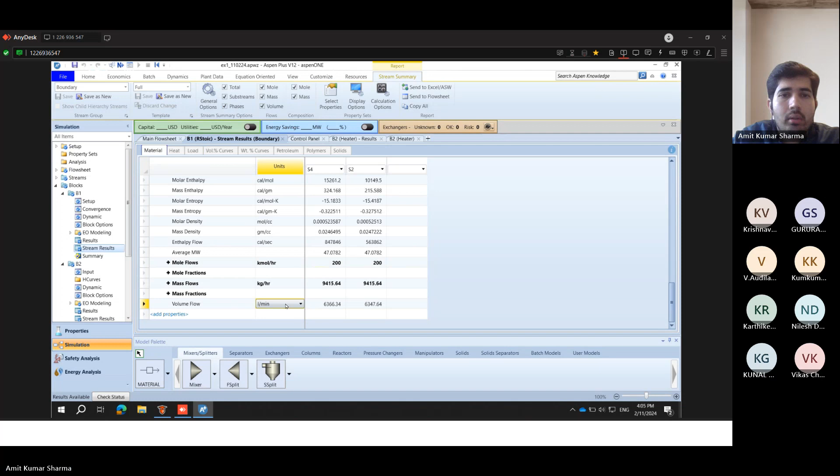Yes, here it is. Yeah, okay. Yeah, volume flow. So 6347. I think this is the S2 or S4. Unit change, sir. Change the unit. You have to change the unit also. Meter cube per hour, cubic meter. What is the unit? Meter cube per hour. Yeah, cubic meter per hour.

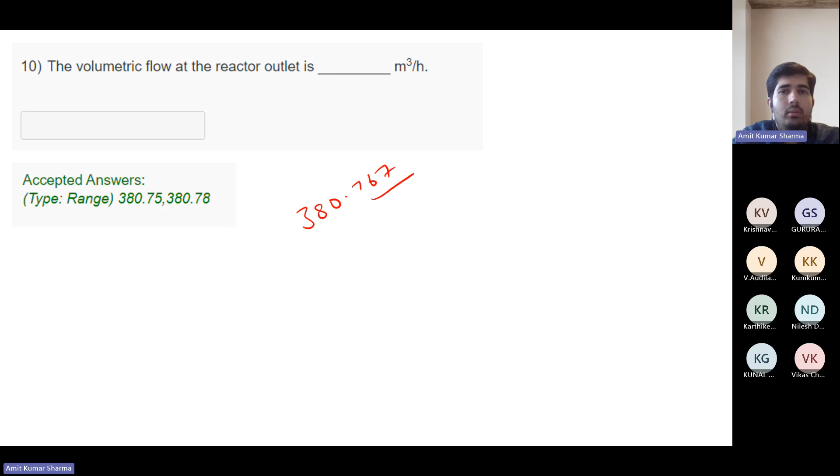380.858. The stream is, let me check, S2. So here the stream is S2, 380.858. Yes, 380.858. Okay. So this is the way to do the question. Let's see other questions. So reactor simulation may be performed by RadFrac, RStoic, REquil, RGibbs. Anybody? REquil and RGibbs.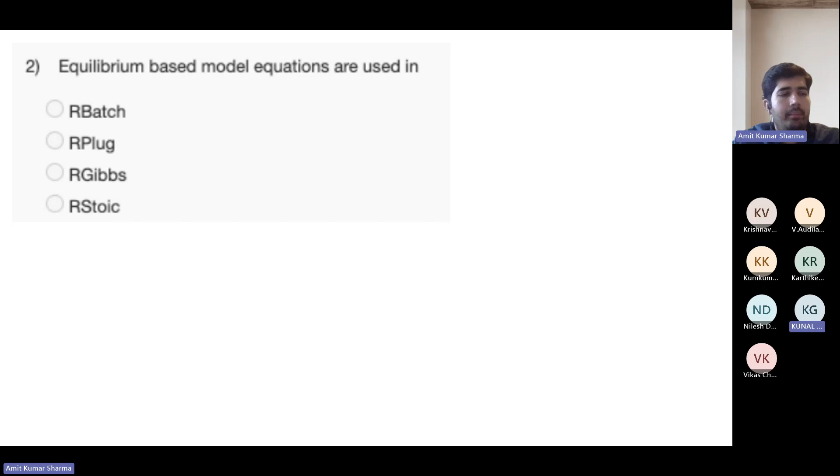Okay, the equilibrium based model equations are used in? RGibbs. Only RGibbs? Plug and batch also? Only RGibbs, because it will do both chemical equilibrium and phase equilibrium, the complete calculation. So RGibbs is the only reactor which does the complete equilibrium calculation and also follows the first law of thermodynamics. Our stoichiometric block can run either simultaneously or sequentially. True. Okay.

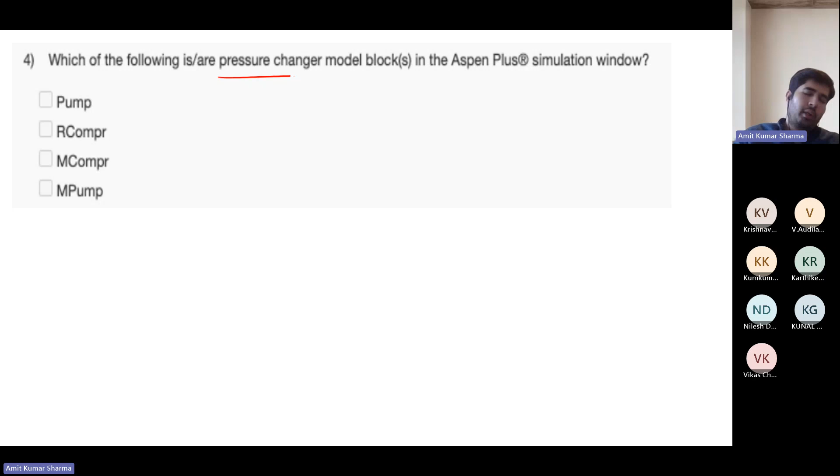Which of the following is a pressure changer model block in the Aspen Plus simulation window? Multistage compressor, MCompr. You can see the model palette in Aspen. Pump and MCompr are the pressure changer models. A pump has been specified as shown in figure 1. If the discharge pressure is 20 bar, the inlet pressure should be? We have given the pressure ratio here. 5 bar, because discharge pressure is given, just divide it by the ratio.

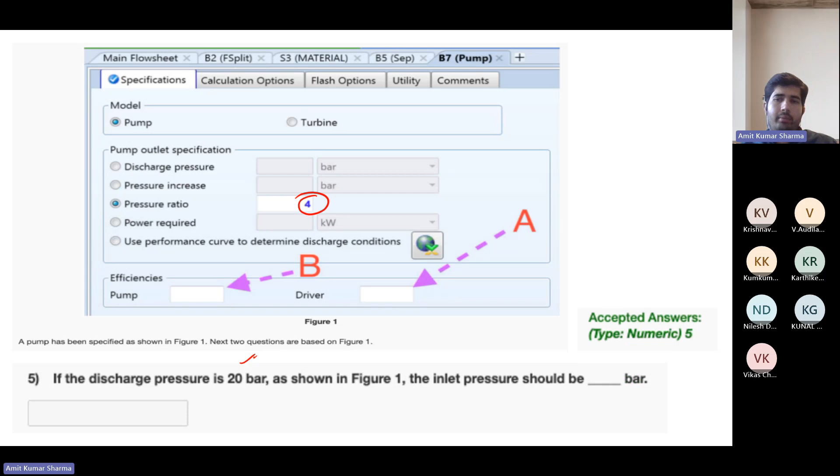If the efficiency of the pump and its driver are 70 and 90% respectively, then the missing data at A and B are 0.7 and 0.9. The point of this question is that you only mentioned the efficiencies, but not whether it's percentage or fraction. When you have efficiencies, you need to enter them in fraction format. Okay.

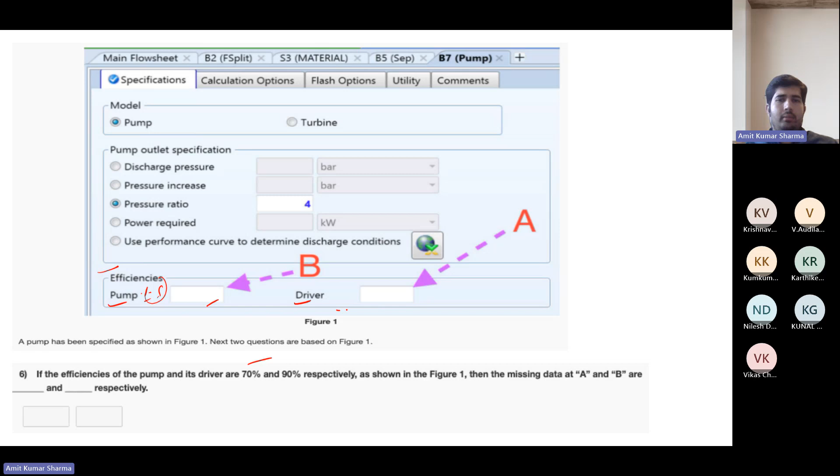A turbine converts kinetic energy to electrical energy. Thermal energy? True or false? False. So what will the turbine do then? If it is false, why? So steam at superheated stage will impart its energy to the shaft of the turbine, and therefore it will rotate, and the steam will get saturated or condense, or maybe stay just above saturation. So you are supplying steam that drives the turbine and you have mechanical power. What does that mechanical power do? Generates electricity.

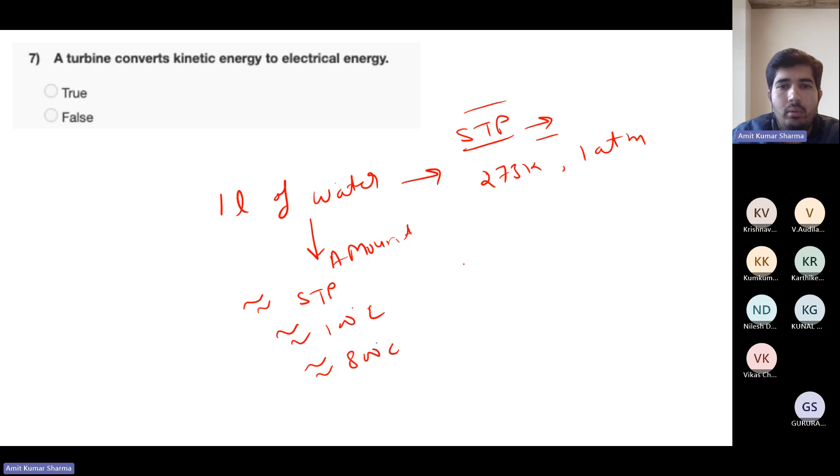So now I want to know the approximate amount of steam at STP, at 100 degrees or at maybe 800 degrees centigrade. Just quickly tell me. One of you said 1500 times. So at what temperature? Either at STP or 100 or 800. Because it's a huge difference.

And the pressure is 1 atm. Pressure also plays an important role. So when I'm saying 100 degrees, I'm also wrong actually. I need to also tell you the pressure, because at STP I'm telling you the pressure, but at 100 degrees I mean 1 atm 100, 1 atm 800. This is the correct way of saying it.

Now let me know the amount. Just quickly, 1 minute. Anybody? Roughly, you can do just a rough calculation. You don't need to be exact. One of you said 1500. Please, do you want to explain it?

Sir, usually the volume of steam is around 1500 times that of water. This is like a thumb rule, but I haven't calculated it yet. Thumb rule is fine, but at what temperature? You need to know that. Okay, sir, I'll look into that. So the thumb rule is that if you are talking about water, then you are correct, or almost there actually.

So what is the boiling point of water at 1 atmosphere? 100 degrees. So when we are talking about the thumb rule, you need to also know the temperature and pressure. For the thumb rule, not the standard one, the pressure is 1 atm and temperature 100 degrees, then it will be around 1500 times. Exactly, I think 1571, or around 1600. So roughly 1500 to 1600, you can do the calculation, okay?

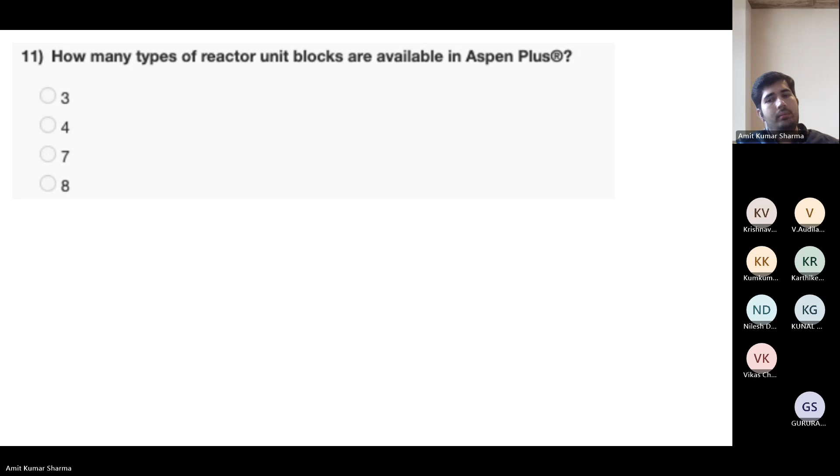How many types of reactor unit blocks are available in Aspen Plus? 7. IAPWS stands for? Option C. Yes, International Association for the Properties of Water and Steam. Okay, so these are the questions for today.

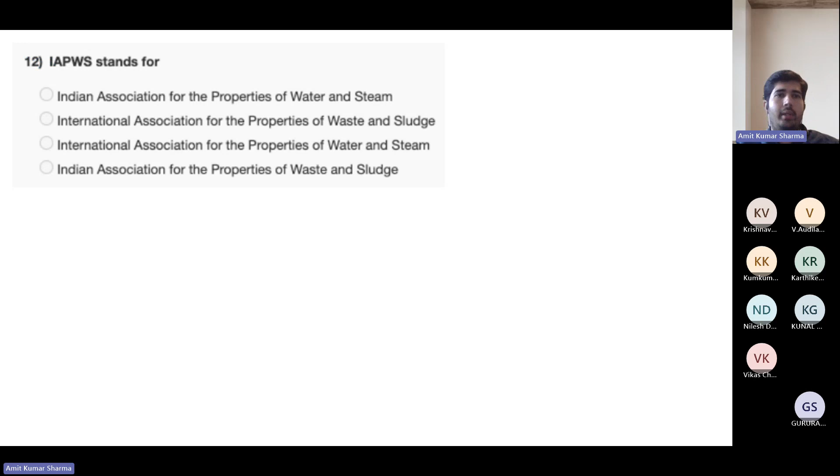Now let's go to the heater. I think we had a discussion there. So heat duty. As we are giving heat to the heater, it should be negative. But somehow I think I was also getting positive, so I have to look into it, but it should be negative. Why should it be negative? Because we are giving heat.

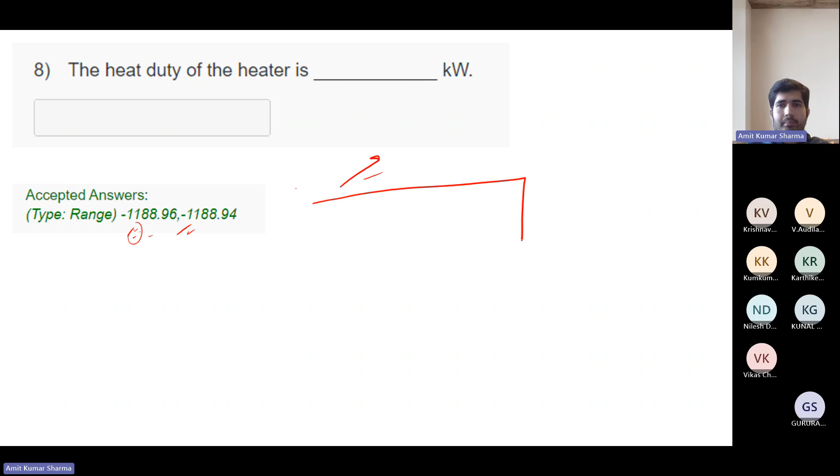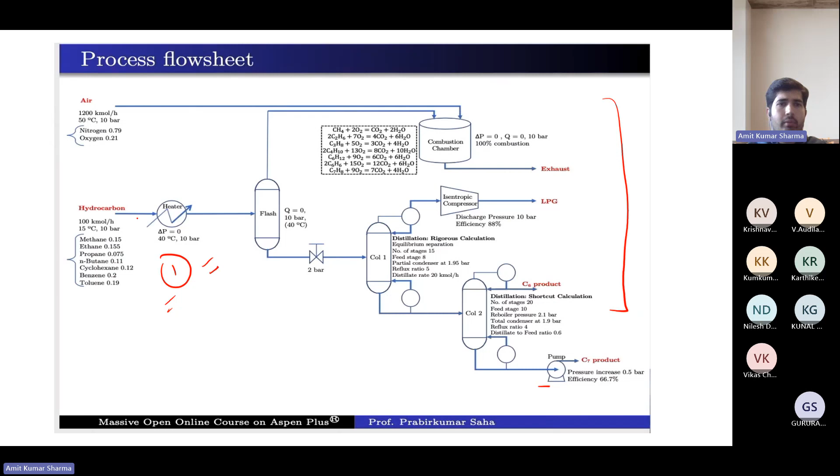So first, what are the major units that require energy input? Just quickly, not in detail, by the look only you can see. Sir, heaters and reboilers. Heater requires energy. Heaters and distillation reboilers. Compressor also. But we don't know the exact details about those. So the heater will require energy for sure if you want to increase temperature. Then the compressor also, and the pump will also require energy.

And which part will release energy? We have a combustion chamber here. We are burning the remaining fuel from the flash tank in the combustion chamber, and we have exhaust gas. So what do you think? Do we have any system here that uses this exhaust gas? Because if you are burning this, the temperature will be around 400 degrees centigrade.

So is it good to flare off this exhaust directly to the air at 400 degrees centigrade? Do you think this is an optimized system, or can we use this exhaust heat? No, it is not optimized.

That's what we can do in Aspen actually. If you check the system energy balance, you have info that this energy is required to input into the combustion chamber, delivering this energy. So basically the net energy you require or you are generating - you will have that kind of energy balance.

But with the analysis, you can see you have heat available here. Suppose if you convert into the flow rate, suppose you have 50 kilowatt heat available here. So there is a potential of 50 kilowatt heat. Maybe this heat can be used here.

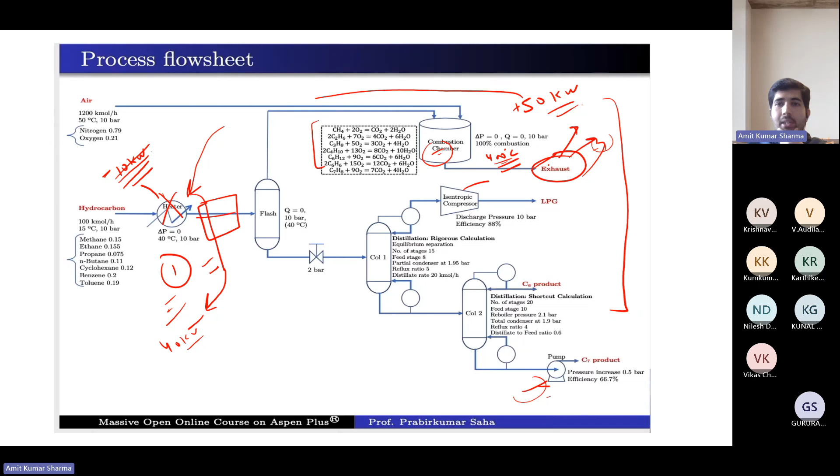Now suppose if you still have some exhaust available, suppose the flow rate is very high, say 100 kilomole per hour - just suppose. Maybe you can put a turbine also. You have temperature, you have higher flow rate, you can put a turbine and give that power to this compressor, directly coupling the turbine with the compressor. Then you can eliminate the input energy here also.

So in that way, we can optimize our system. We can do the energy and exergy analysis, and tweak the system design. We can tweak the system only in Aspen, and first we do the whole balance, then we implement it. Like this pump also requires some input.

So we can also see that we can get some work from this turbine. Suppose if you are putting a turbine here, we can also give work from the turbine to the pump also. So this is the main, basic use of Aspen. As of now, we have only covered the unit models, but now we are moving towards a complete process flow sheet. In further weeks, you will look into things like how to optimize the system, how to do all these things.

Okay, so I think we have covered enough for today's class.